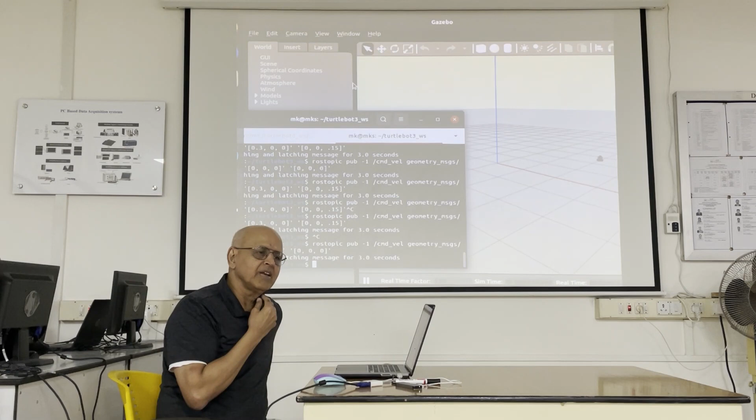Okay, so the second thing I posted was, if you can get it installed on your own computer, you will be in a much better position because you have the software, you don't have to come here, and you'll be able to work on it whenever you find time. So think about that.

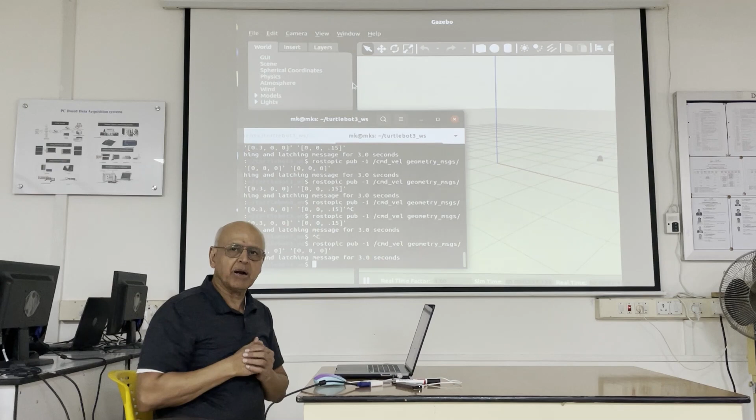Now, a word about yesterday's problems. To summarize, there were two problems. One was mine, when I was running the program that I'm about to run, and the other one was your tab completion. You are not able to use the service call to move the robot to any location, right? Now, we don't know why that is happening because my students back in the US use exactly your setup and it works. So it's one of those mysteries. I told you the open source community is not perfect, and we probably can't solve that, but you're not going to be working on the Ubuntu side.

Most of the time you're going to be on the MATLAB side. So hopefully when I show you the MATLAB program, which I already posted, the circle program, and if that works for you, it means that you can issue commands from MATLAB. You don't have to use that filling-out-the-forms version. Being able to do it from the command line is a nice support tool, but you don't need that.

So two things bother me about that. The fact that no part of the command is recognized; you can't even tab the first parts over. And then if you're willing to put the fields in a compressed manner, like here, we need to know the order of the parameters, and we haven't been able to find a document that says how to put in the frame of reference and the name of the robot. So, as I said, you don't have to be on the Ubuntu side to do those things.

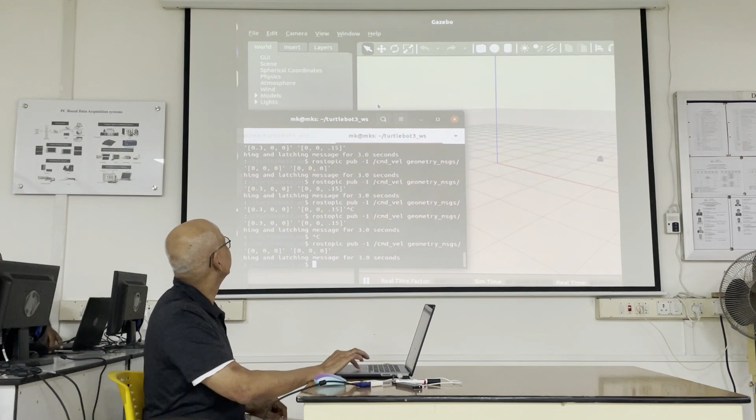Now everything is shut down except this. And I just tested it and it worked, but I bet you when I test it in front of you, it won't work. I hope not. So let me reset the world so it comes back. And then I need to make this small. I do not want it to be this big. What happened to my...

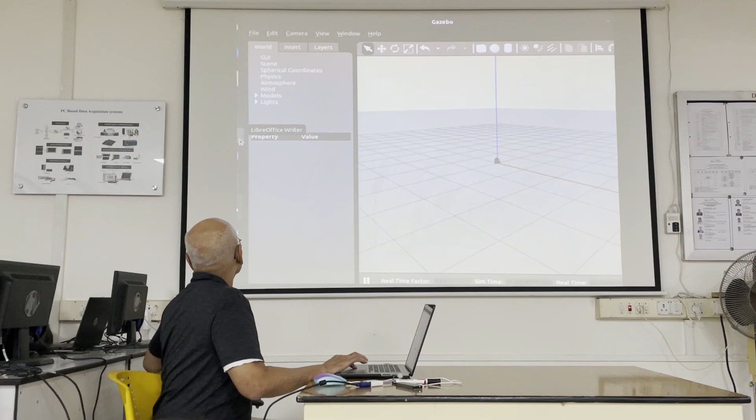It's okay. So you see what happened here? I had to stop it with a 0 0 0 command. Remember I told you about this? That it does not have the so-called watchdog timer, a safety feature. So it will go on, even if you stop publishing the other command, it will go on and on. So you have to put a 0 now to override that. So that's what I did here.

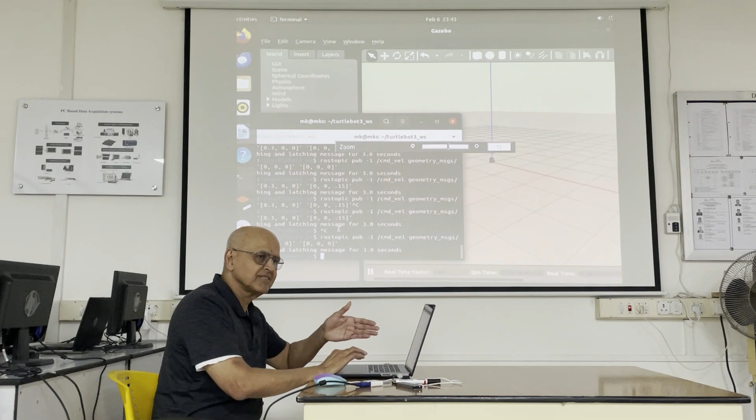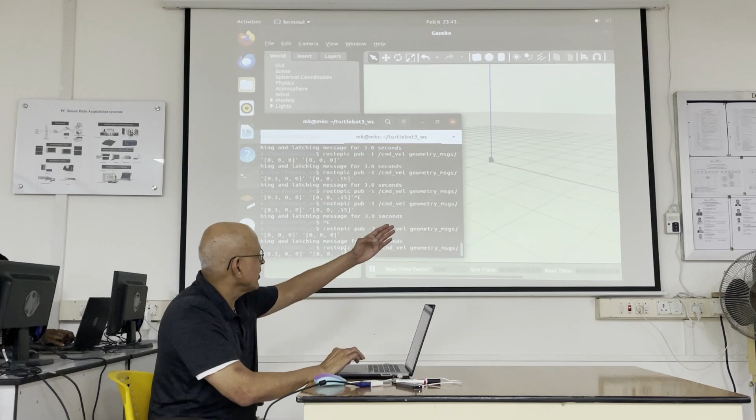So let me go back to the command before that. You see here? It's 0.3 forward velocity. Don't give any Y or Z velocity because it doesn't have any meaning for this particular robot. It's not a drone. And then you give a rotation rate about the Z-axis of 0.15 radians per second. So 0.3 by 0.15 is 2 meters. And that's what you see there. Each square is 1 meter by 1 meter.

So hopefully it does not fail here. Yes. So it will top out at 2 meters and then it will go 4 meters on the other side because we started at the origin. And then it will keep on going. So you can do that from MATLAB too. I just wanted to show you that it's also possible to do it from the ROS level.

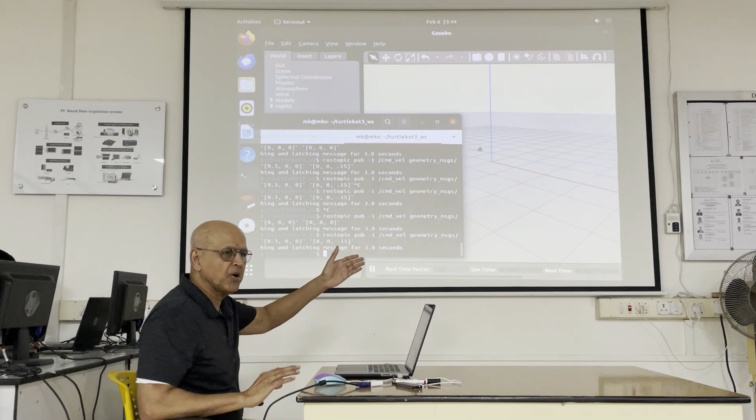I also put up a document on how to use the mouse. No, you all know how to use the mouse. How to use the mouse for zooming in, zooming out, panning. It's very useful. This trackpad doesn't work very well for that.

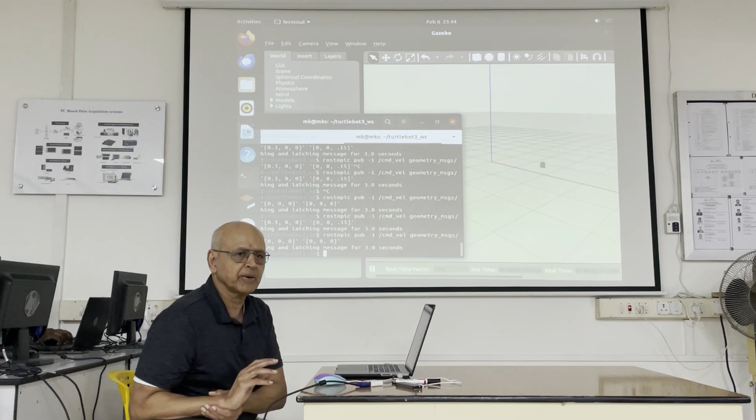So let me go with the other command, which is 0 velocities all the way and stop it, and it stops. So try this out. Even those things that you could not try out here because of some problem, that's why it's nice to have the software on your computer. You can try it out, all the missing stuff in the 2 documents I posted.

Okay, now, the other thing I want to show you before we move to the MATLAB code is to bring RViz in. Hopefully you can follow this part.

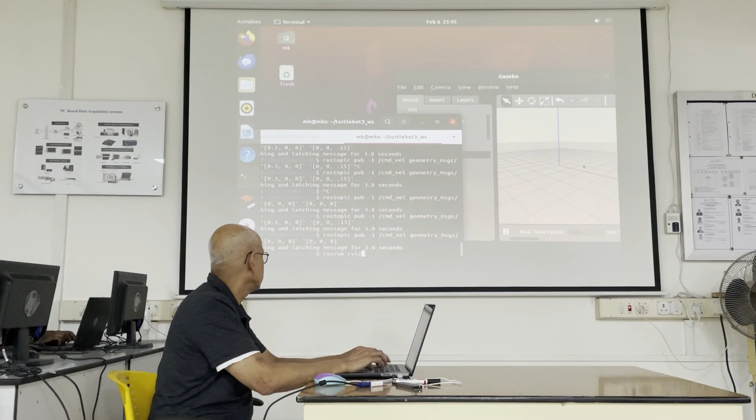I think when I go home, I'm going to fill an entire wall with a display.

Okay, you see that add button was missing? And that's because when you size it a certain way, it disappears. It tries to say, okay, I can't show you everything, so I lose the add button. So now, hopefully, I can, I guess I can't do that. Shall I try changing the resolution? Yeah, sure.

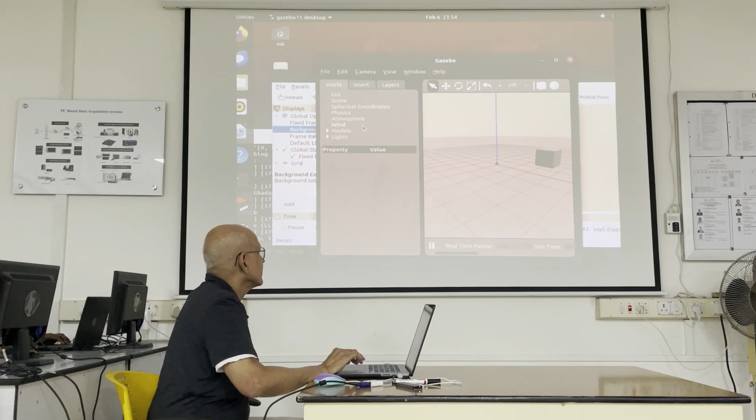I'm going to put it there. And then I'm going to reset the world because I want the robot to be back at the origin. So now it should be able to see the cube. But we haven't done everything we need to. The laser scan. The topic has not been chosen. So it is the scan topic.

If you put rostopic list, you'll see /scan as a topic in the list. And I'm telling you, because I have experience, that this is the name for the laser topic. Just like odom was for odometry, so you have to just accept it from me. So put scan. And then one other thing I like to do is I like to make this marker size a little bit bigger.

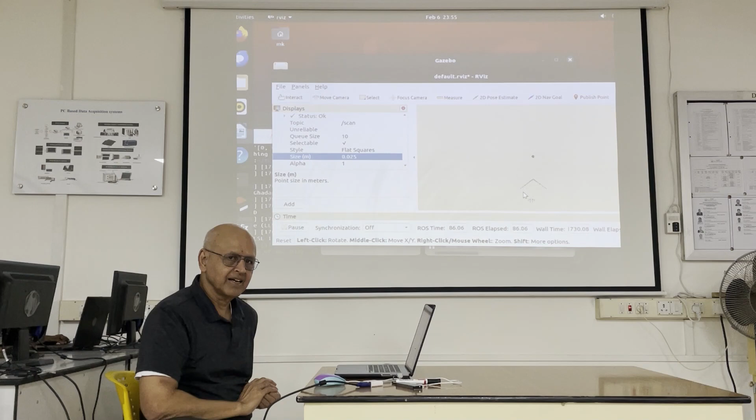Maybe 0.025. And it does show up. Did you all get this? Where did you get stuck? When I added robot model, it still comes in red color. The robot is in red or? So left pane that says robot model. That is red color. Oh, you're getting those transform errors? Yeah.

So there is that patch, I put it on Teams. You have to add it into the launch file, yeah. No, into the launch file. There are some transformations that are not being published. I put it on Teams, yeah. So your launch file is missing some code, and I posted it yesterday on Teams. Yeah.

So here's the relevant information there. Here, 5 patches, you see? Now, here's what you can do. This is the easiest fix. You remove the launch file, remember empty world launch? You remove it. Now, that's not easy because I think you need permissions, but you know how to do that, right? With a sudo. So you remove it. Then you take this file and you copy it in. For that also you need sudo. So that is the best way of doing it.

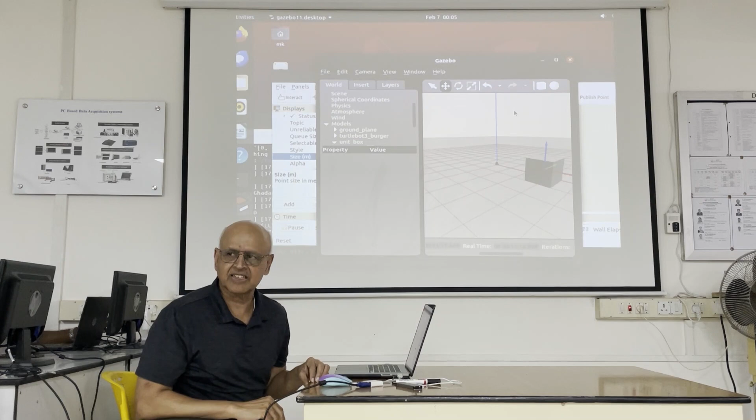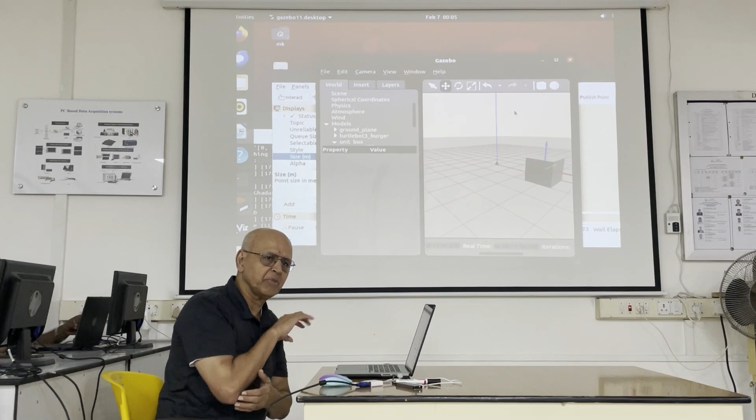Now why am I saying all this? Because in the homework exercise, assessment exercise, you're going to shoot a Kazam screen record. And you can pick a nice view. You don't want to be so far away that the robot looks like a dot. So Kazam is an application in Ubuntu, K-A-Z-A-M. It's very easy to use. People of your age will be able to figure it out much faster than somebody like me. So you can figure it out, and once your algorithm is ready, you can submit. The details of what you need to submit will be in the problem statement. Don't worry. But you can just submit that, to show that everything is working.

Now we'll get to the homework. Probably won't have time this morning, but in the afternoon. But I want to actually show you the MATLAB program. So what I'm going to do is, I don't think I need RViz anymore. So I'm going to go back to the RViz screen. Is it this one or the other one? If I see the whole thing, I can tell, but I'll take a chance and kill this.

Yeah, it is. But the screen should disappear. Come on, come on. No, maybe I killed Gazebo. Yeah, I think I killed Gazebo. That's okay. I'll kill everything and start. We'll kill this also. Okay. Alright, so first thing is relaunch Gazebo. Yeah, there it is. It's launched.

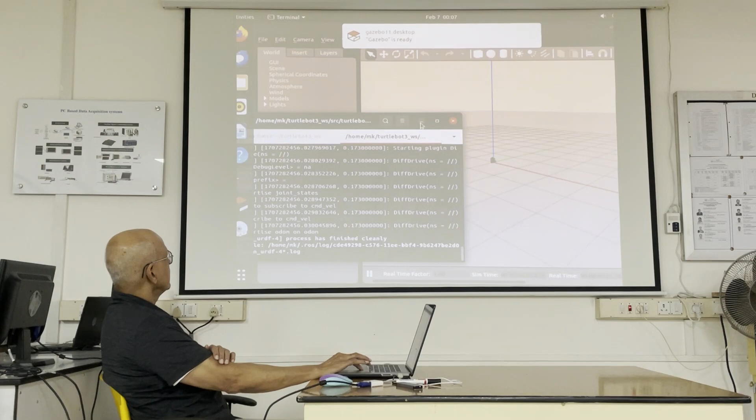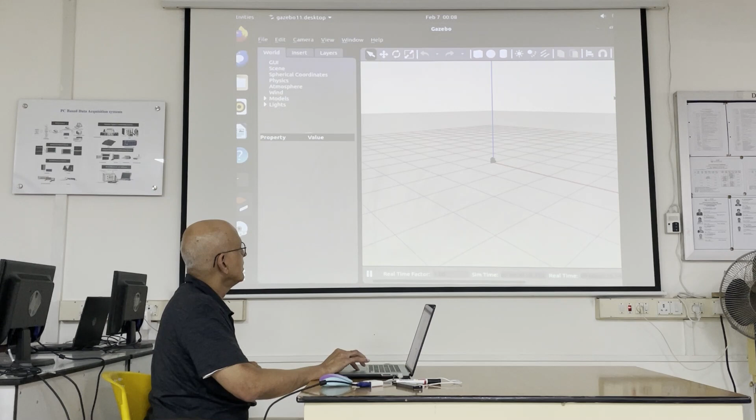So I'm going to bring up the MATLAB program now. And right now, I would rather show you the MATLAB program, so I'm going to move this over. Okay, MATLAB is loading up.

Now, we may not be able to get through all of this, but because of that, I don't want to speed up. Because, you know, for you to do the homework assignment with the least amount of effort, this discussion is very important. So I don't want to speed up. If we don't finish, we'll continue in the afternoon. But let's start from the beginning and work our way down. Okay, now.

So this is always needed in a MATLAB program. You know why? Because if you've previously run a program, maybe for a different course, and the variables are sitting here, and now you're working on a new course, but you're using some variables that appear to be the same, it's going to grab numbers from the leftover variables. Did you know that? That's why MATLAB is called an interactive, script-based language. Because if you leave stuff there, it's like you haven't cleaned up. It sees a variable that you're using in this program, it's going to go get it. It doesn't care whether it's from a previous program.